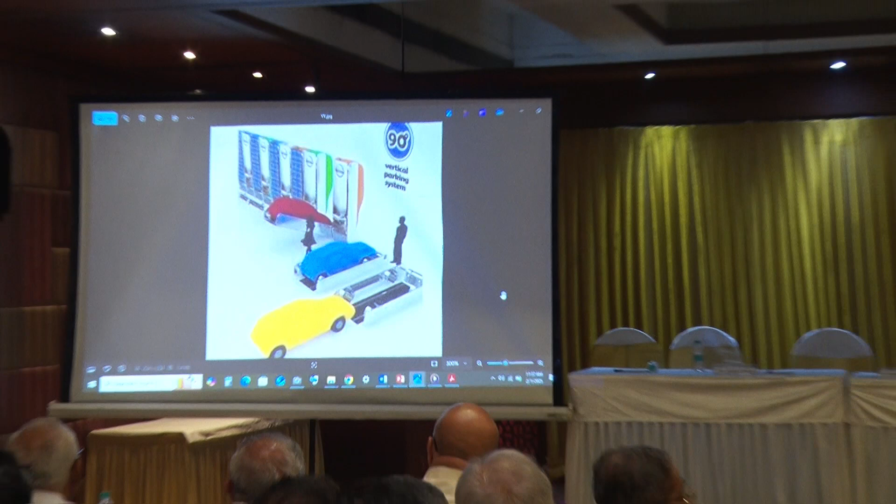It goes like a bed, you know. You reduce the car parking space to about maybe 15%.

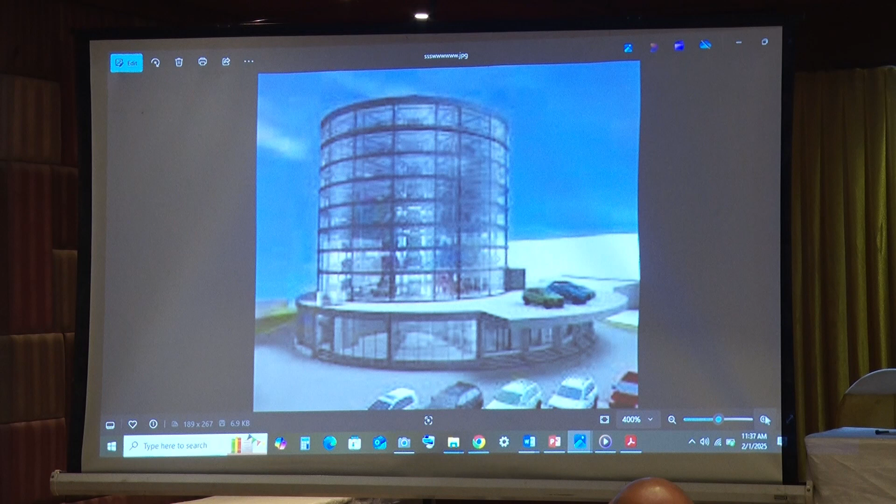As you see, in many high-end projects where they want to showcase their projects in a very big way, say for example for Mercedes cars or something, they have car parking like this, you know. Not in Mumbai for sure, till date.

Now, another option in the market which is not recommended, but something where nothing else is possible. Say you have a small building of about 20 floors, no parking at all, nothing is there. You have a small garden and just one entry exit. With that one entry exit, you park maybe 30 odd cars below the garden. So you've got 2 gardens like this and a building, and you got this planned.

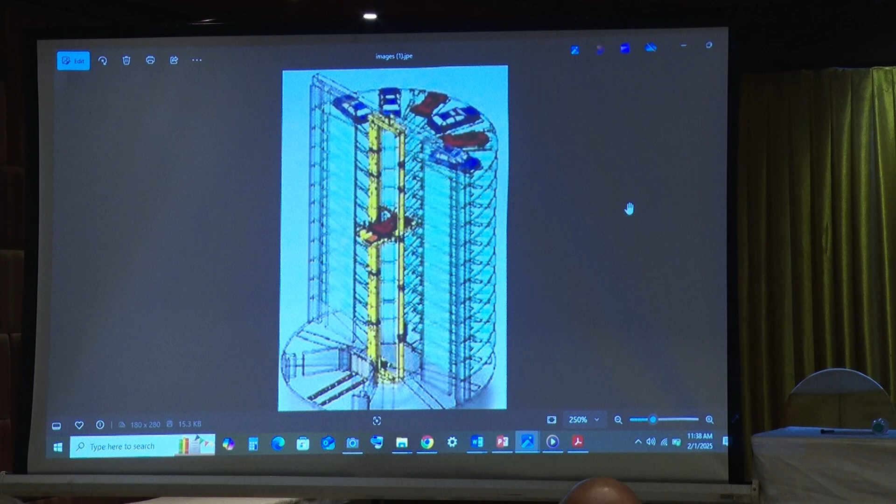Now you also have something coming up in the market called circular car parking system. You've got one lift, and you can park about 80 odd cars through this.

It's a very common photograph. We hope in the next 30 years, Shantilalji plans something like this in one of his projects, and we get a high-end circular car parking tower.

This is a car parking tower, a car parking system. A car parking tower which can be in civil and steel, as is in Thane.

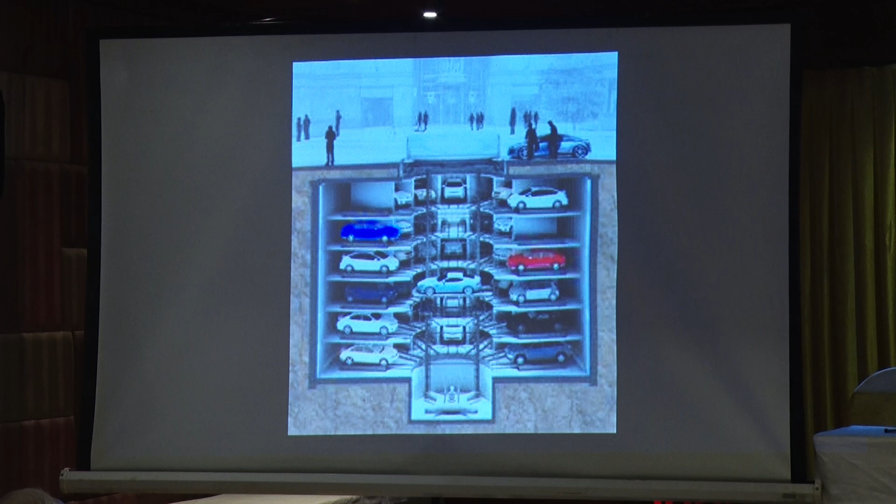This is what I think abroad people do. They have a normal planned steel structure. I'll show you something better in that. So this is what is done abroad - just an option for the structural experts here.

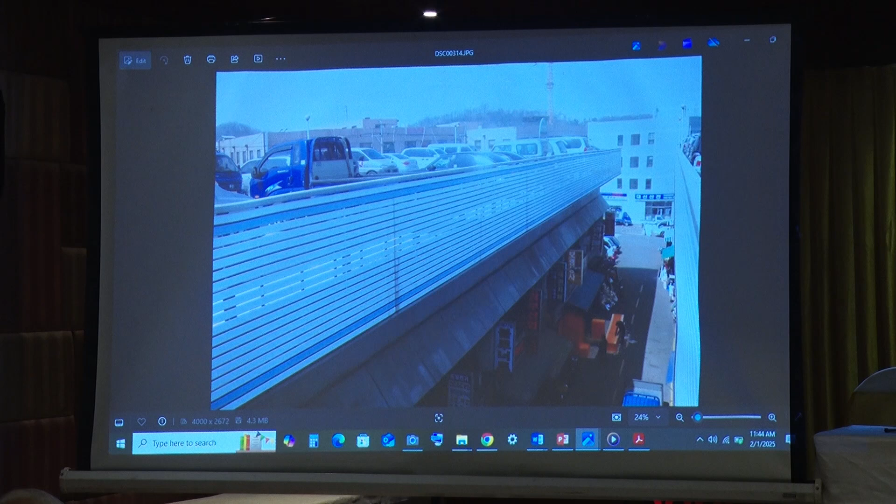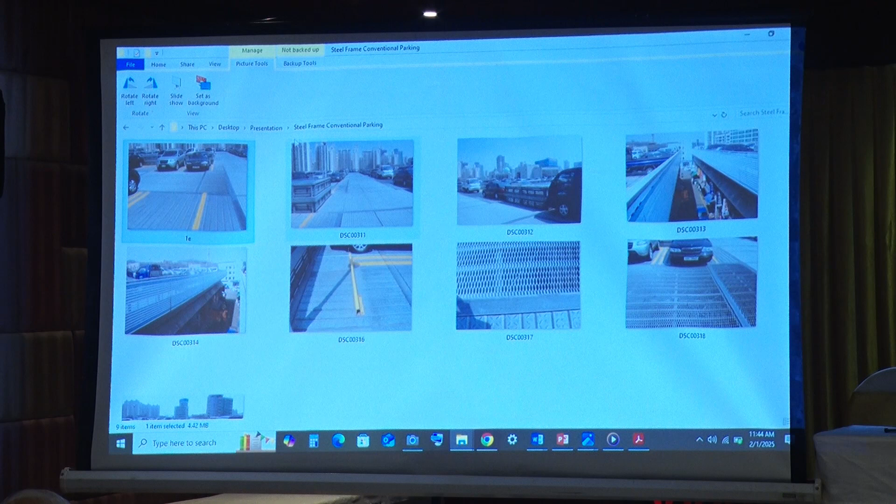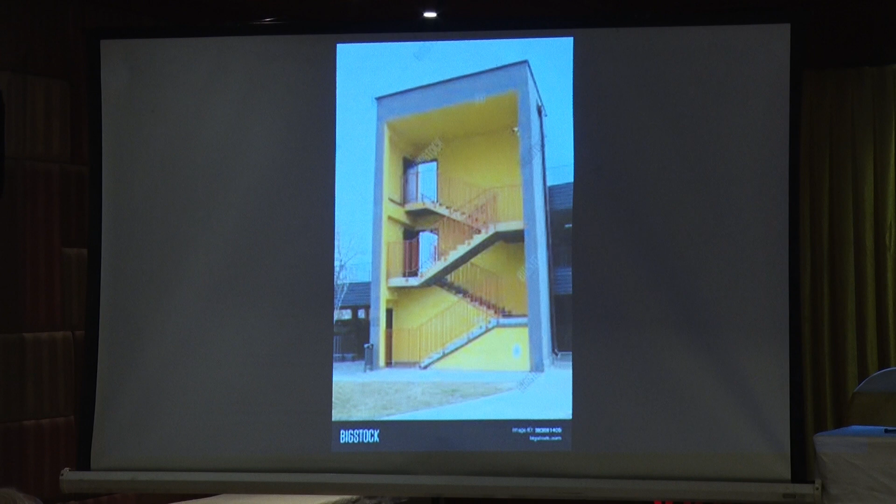Before I end, just a recap of a few things. There is a combination of car parks planned. This is actually for the car parking tower where you've got a service staircase planned. This is that one-by-one tower on the other side, not vertical but horizontal. It's a very neat podium. It is that high-end robotic car parking.

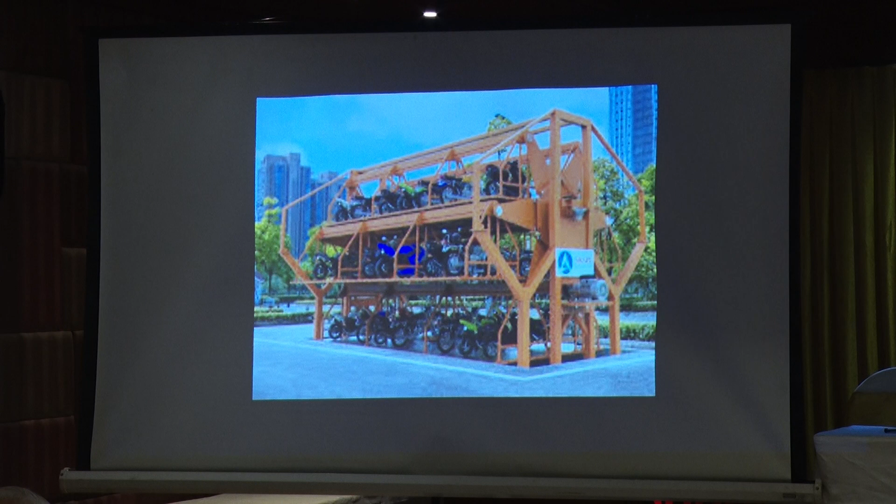I think this is that Gulab Park, Mahalakshmi. This is an image of a fully automatic car parking system. This is a bike 3-level parking system. This is a chest parking system. Some countries make it really high-end, even the car parking looks great. This is a 2-level above and one in the pit.

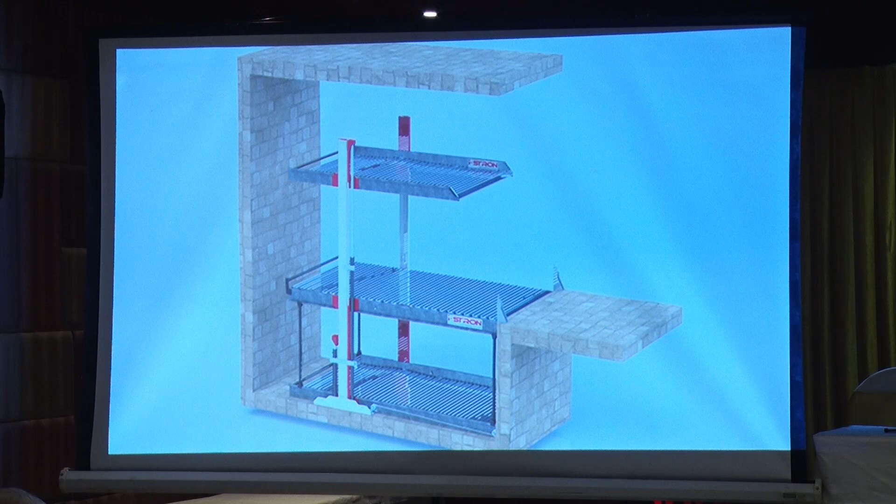Most cost-effective system to residents today. This is how a car park looks in a very high-end building where you've got about 400 cars through about 5 lifts. There is a project in Bombay which I cannot tell you - they are planning multi-level car parking for buses. They get about 80 buses in a day, so they are planning for that.

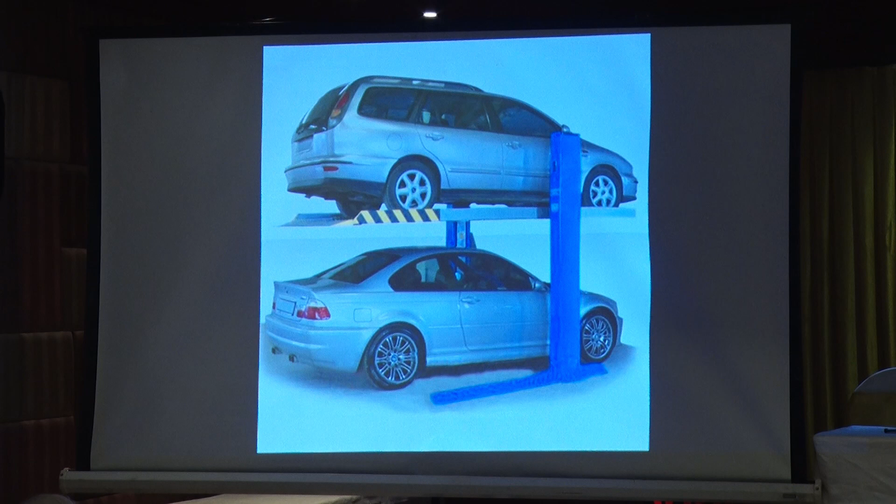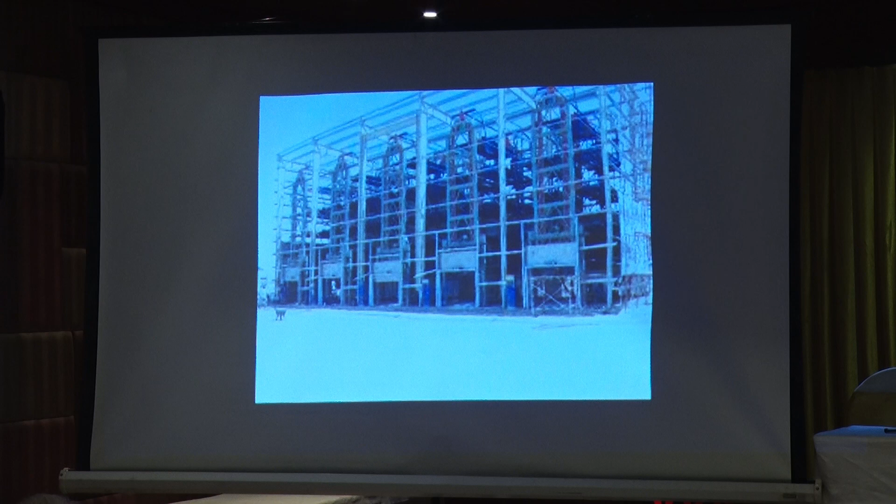This is like the chest parking system. This is a rotary car parking system, not recommended - it has a market share of about 0.5% in India, but where you cannot do anything else, you can have a rotary car park system. You can have a covering on all sides to make it slightly safe. This is a puzzle parking system. This is a system where you've got only one entry-exit into about 30 cars.

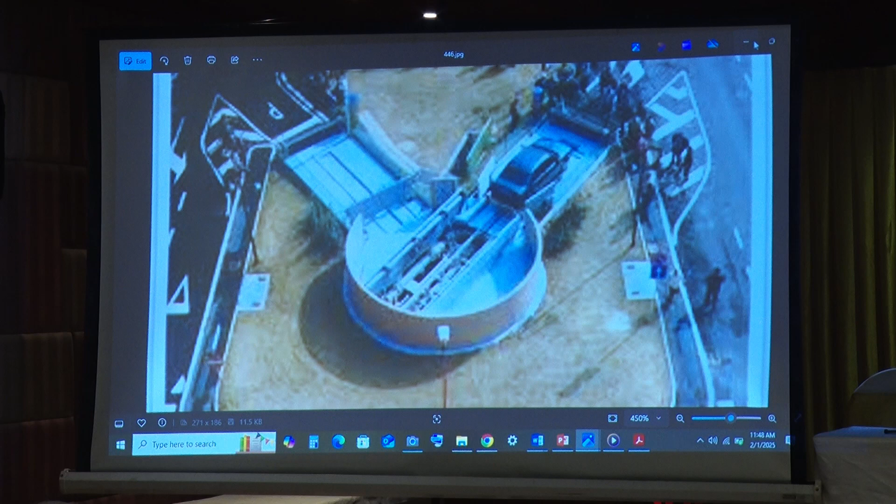Thank you everybody for your time, and I hope we all plan better with a lot of aesthetic sense, on a humble note, to see to it that we have world-class infrastructure coming up in Bombay as well. We are improving drastically, but maybe we are sure we can do it better. Thank you for your time. God bless.